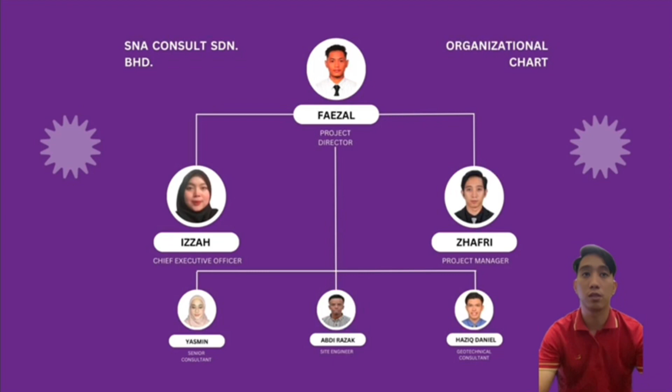I'll pass to my friend. Hi, my name is Yasmin and I will share about the project description. First is the project background.

SNA Consult Sdn. Bhd. has been appointed to conduct a comprehensive examination and assessment of the soil located at Batu 17, Rawang, Selangor Darul. The main objective of this investigation is to develop a suitable foundation plan for a 4-story hostel building. Conducting a site investigation is crucial to collect the necessary geotechnical engineering data required for the design, evaluation and eventual construction of the proposed structural foundation.

This project will involve analyzing the bore log, soil parameters and columns, as well as carrying out foundation work. The project will determine the type of foundation required and perform an analysis of its bearing capacity. It is imperative to design a robust and stable foundation to ensure the strength and safety of the structures that will be constructed on top of it.

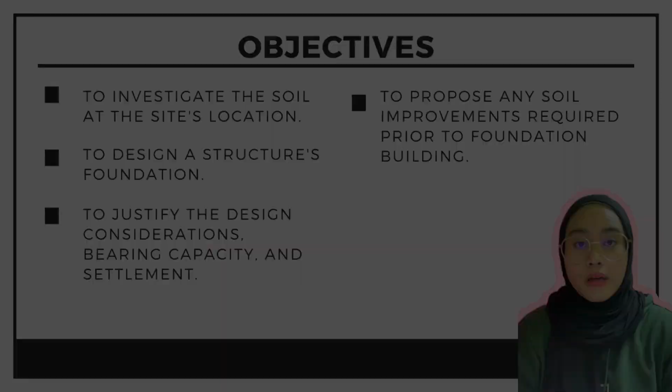There are 4 objectives of this project. First is to investigate the soil at the site location. Second is to design a structure foundation. Third is to justify the design consideration, bearing capacity and settlement. And lastly, to propose any soil improvement required prior to foundation building.

The site location of the project took place at Batu 17, Rawang, Selangor Darul, which is located at approximately 3.306 latitude and 101.582 longitude. Batu 17 is situated about 42.6 km away from Shah Alam, the capital city of Selangor, and 27.9 km from Kuala Lumpur.

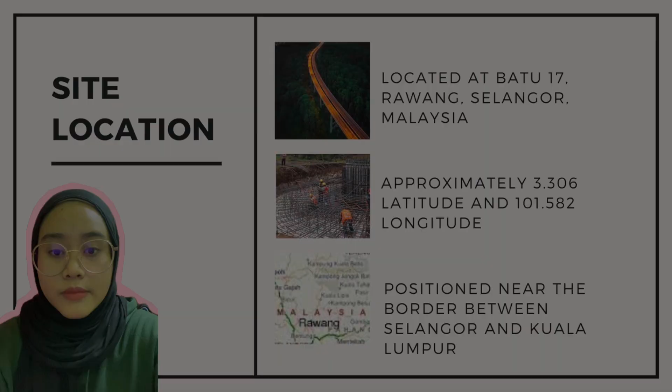And 109.4 km from Negeri Sembilan. The population of Batu 17 averages around 6,000 residents, and it is positioned near the border between Selangor and Kuala Lumpur. Additionally, the estimated elevation of the terrain above sea level is 94 meters. This is the map location of the proposed project. So that's all from me.

Thank you, and I will pass the presentation to my group member. Assalamualaikum, my name is Muhammad bin Yusoff. My matric number is CF200-202. I'm going to discuss Chapter 3, Soil Analysis.

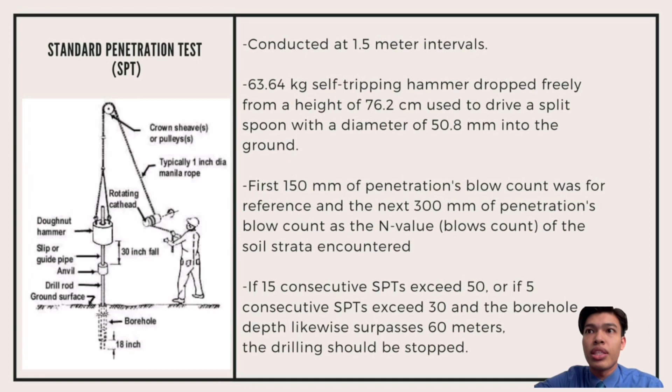Standard Penetration Test (SPT) is conducted at 1.5 meter intervals using a 63.64 kg hammer dropped freely from a height of 76.2 centimeters, where the first 150 millimeters penetration counts as a reference and the next 300 millimeters count as the N value. If SPT exceeds 50 consecutively, or 5 consecutive SPT values exceed 30, or borehole depth surpasses 60 meters, drilling should be stopped. This project consists of 4 boreholes.

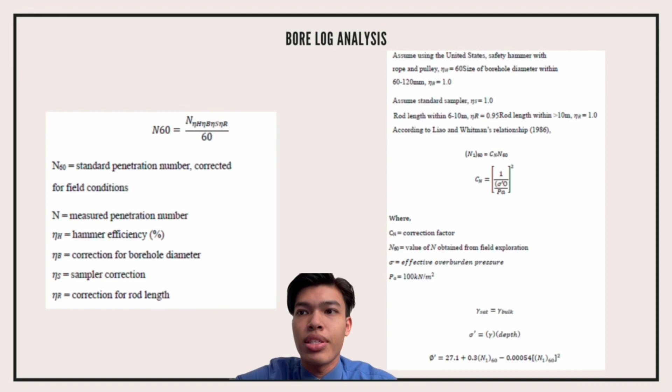The N value of SPT samples is tabulated in the analysis of properties. For borehole analysis, we use this formula. N60 is the standard penetration number corrected for field conditions. These are the average angle of friction for boreholes 1 and 2, and the average angle of friction for boreholes 3 and 4.

For column load, we imported the drawing plan into Esteem software, where we could get the load at each column. This table shows the maximum loading value at each column, with column color marks based on the drawing plan.

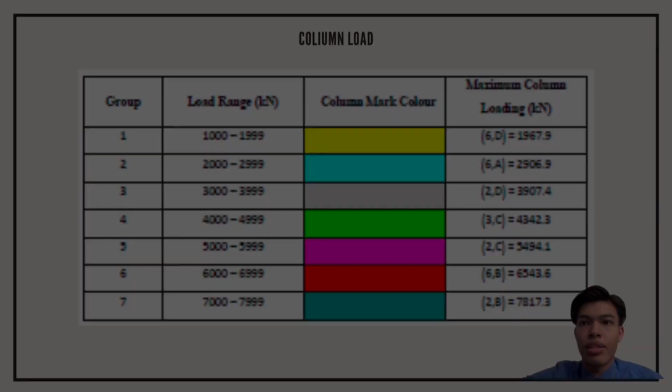The primary focus of this project is to determine the suitable foundation type and perform the necessary calculations to ensure structural integrity. For the calculation, I will present one example of the foundation design.

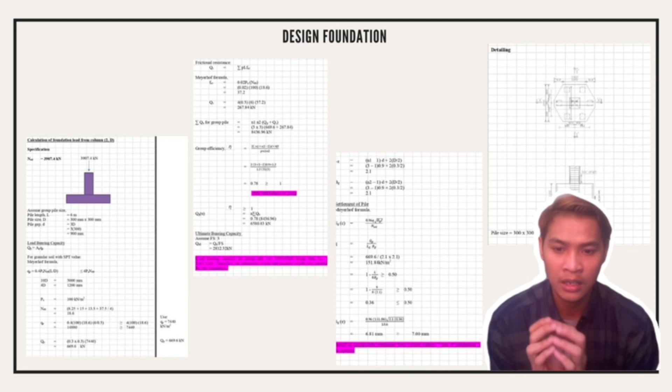As shown in the slide, the specification for our foundation is a length of 6 meters, a pile size of 300 by 300, and a gap of 900. After this, the calculation will determine whether the pile behaves as a group or not, and for our design, the pile does behave as a group.

The load bearing capacity for the group pile was 6,580.38 kilonewton, which is larger than the moment of 1,976.9 kilonewton. Therefore, the dimension of pile and quantity of pile were suitable for this foundation.

For the settlement of the pile, according to the calculation, we used the Meyerhof formula. Based on this calculation, we determined a permissible settlement, according to various authors, of 7 mm, which is acceptable.

Last but not least, this is the detailing that we obtained for the foundation after determining it with our calculations. And that's all from me. Thank you very much.

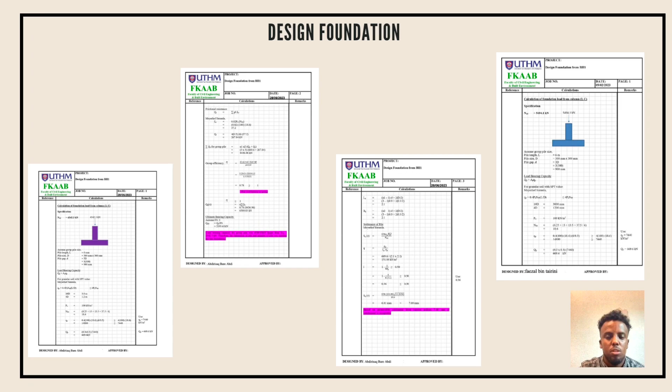Not all soils at a construction site are suitable for supporting infrastructure in their natural state. Soil improvement techniques are necessary to ensure safe construction and the stability of the structure.

The common soil improvement technique is soil compaction. It involves mechanically densifying the soil by applying external forces to reduce its voids and increase its density. This technique is used to improve load bearing capacity and reduce settlement potential.

Next is soil stabilization. Soil stabilization is a process by which the soil's physical properties are transformed to provide long-term, permanent strength gain. Stabilization is accomplished by increasing the shear strength and overall bearing capacity of the soil.

Another technique is soil replacement. In cases where the existing soil is unsuitable, soil replacement may be necessary. This involves removing the inadequate soil and replacing it with more suitable fill material to achieve the desired shear strength. Furthermore, another soil improvement technique is soil consolidation.

Soil consolidation is the gradual reduction of the volume of water in the soil due to drainage and compression. This causes the soil particles to rearrange and settle closer together, resulting in a decrease in pore pressure and increased effective stress.

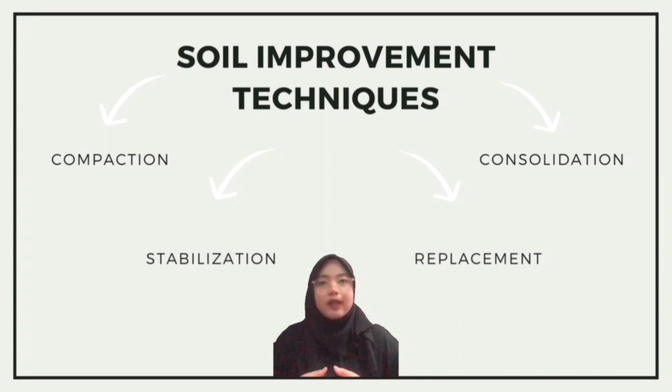In conclusion, the project utilized a deep foundation design, specifically pile foundation, to support the columns. The columns were grouped based on their load requirements, with pile dimensions of 300 by 300 mm, 400 by 400 mm, and 500 by 500 mm.

The length of the pile varied depending on the load carried by each column group, with lengths of 6 meters, 12 meters, and 17 meters used.

The settlement analysis of the deep foundation indicates that the settlements were within acceptable limits, less than 10% of the foundation width. This demonstrates that the chosen deep foundation is capable of supporting the above-ground superstructure effectively. That's all from us. Thank you for watching.